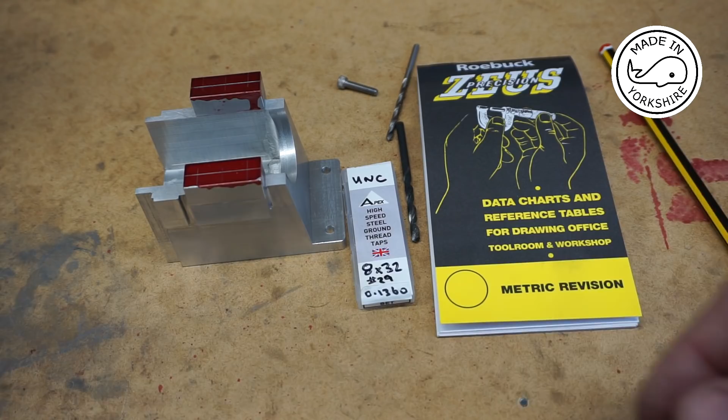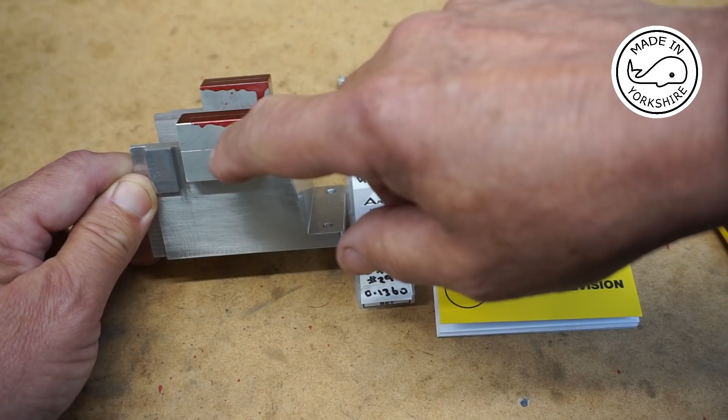Okay, so I've already machined the tops for where the bearings fit and marked them up, and I've super glued them onto the rear frame so they're spot on in the correct position. My plan is, for each of the holes, to put it on the mill and drill through with a number 29 drill bit right through.

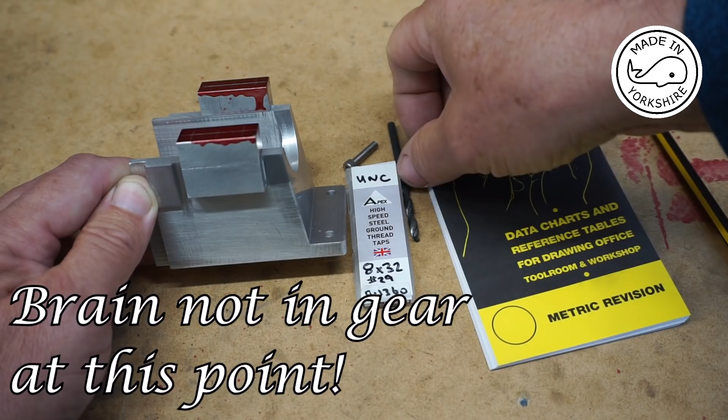Once I've done that for one hole, on the very same hole I'm going to drill through with a number 19 drill bit, which is a clearance drill for this 8x32 UNC bolt, and I'll just drill through the top bit and stop.

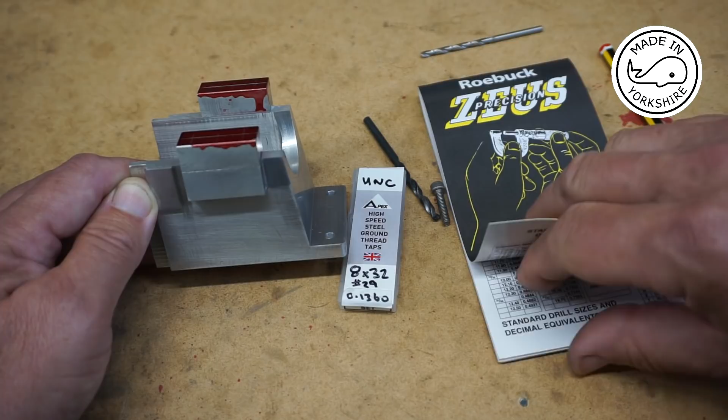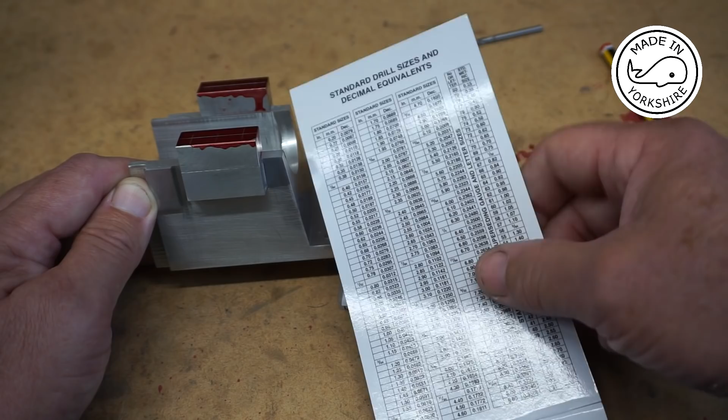I don't know whether anybody's, I guess lots of people use these, but for those who don't, this is a fantastic set of tables to show you all sorts of things. One very useful one is the actual standard drill sizes and their equivalents. Very, very useful information in that.

Anyway, just to get back to this, once I've drilled the top bit, I'll then tap an 8x32 UNC thread. Once I've done that, I'll do all the other three in exactly the same way.

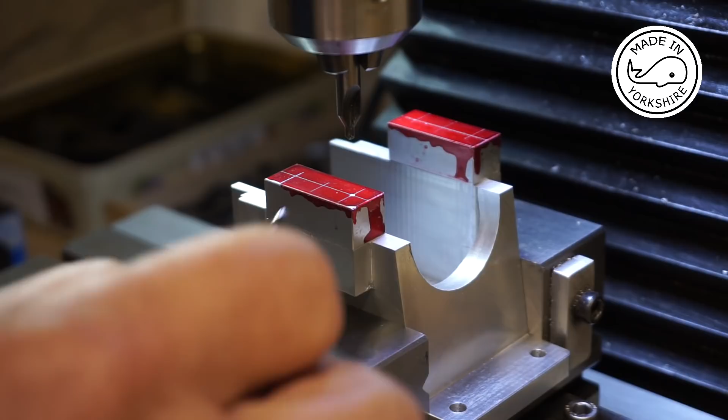Okay, so I used an edge finder to find the centre using both the X and Y axis, and it positioned me spot on in the middle where I've marked up. Now I've moved the X axis this way by 0.4 of an inch, and that's put me spot on my mark that I previously made. So what I need to do first of all is centre drill.

And now with the drill, the tapping drill size.

Now I've just realised my mistake. I shouldn't have gone right through, I should have only gone partially down here. But anyway, I'll try and get it right for the other ones. Well, I could kick myself for going right through there, total lack of concentration, I've got my mind on other things. But anyway, this clearance drill needs to go to a depth of 0.45 of an inch.

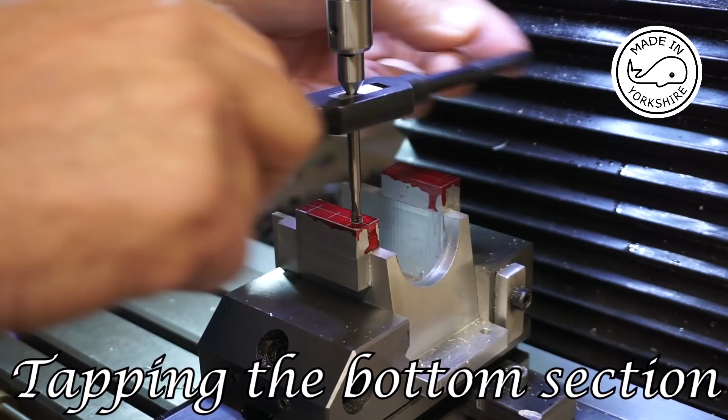Well, I think it's going to be one of those days today. I now realise I've not got a hex key for that. But anyway, what I'm going to do for the other three holes is follow exactly the same process, apart from, hopefully, not drilling right through it. So on the lower bit I'll drill to a depth of 0.4 of an inch.

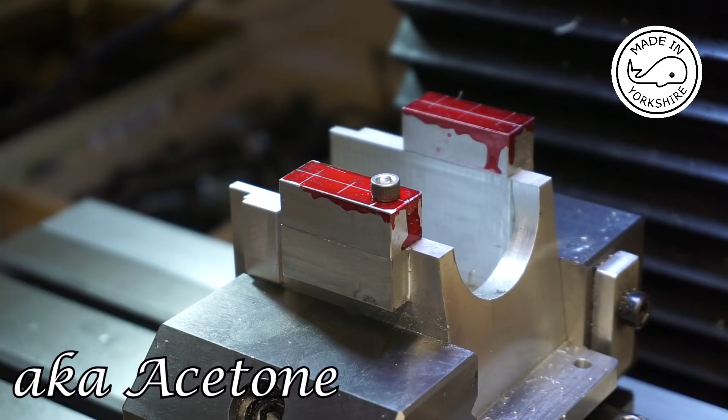Now I'm going to leave that bolt in there just to provide extra support, just in case. And likewise, when I get to the back bit, I'll leave a bolt in there. Once I've done all four, I'll take the bolts out, apply a bit of heat to break the glue joint, and then use some nail varnish remover to clean up the faces. And I think once I've done that, I'm going to have a bit of a rest, and get back to it tomorrow when I've got my brain into proper gear.

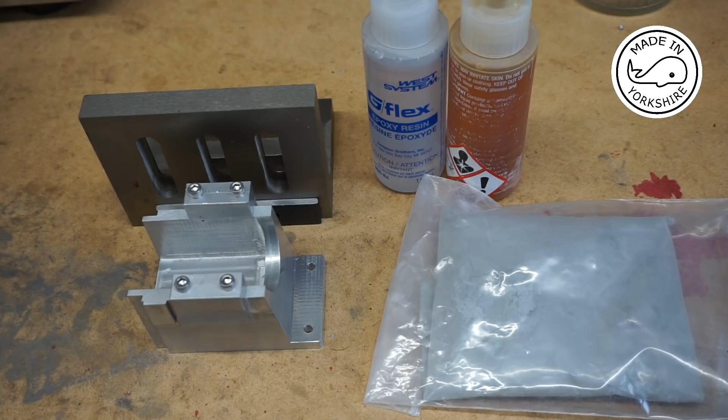So another day and things are starting to look up. Before breaking the glue joint, I put some witness marks on the top and the frame, just to make sure that when I reassemble it, these tops are going back on the right sides. And I cleaned the faces up with acetone and rebolted them down. So I'm happy with that so far.

Now, in terms of the hole I made, I filled it in, if I can find it. Must be good if I can't find it. Oh, there it is. What I did was, I was thinking back to my wood turning days, where I used to introduce aluminium into the wood using some epoxy resin. So I mixed some epoxy resin up and put some aluminium powder in, then filled the hole and left it overnight, and that's worked perfectly. Well, you can still see a bit of it, but better than JB Weld, which would dry a bit darker than that.

So what I need to do now is work out how to drill some half inch diameter holes right through here, making sure they're totally aligned and perpendicular with the base. What I've decided to do is drill a hole through the base. Now I can sort that out later on, so it won't be obvious that I've done that. I can peg it or something.

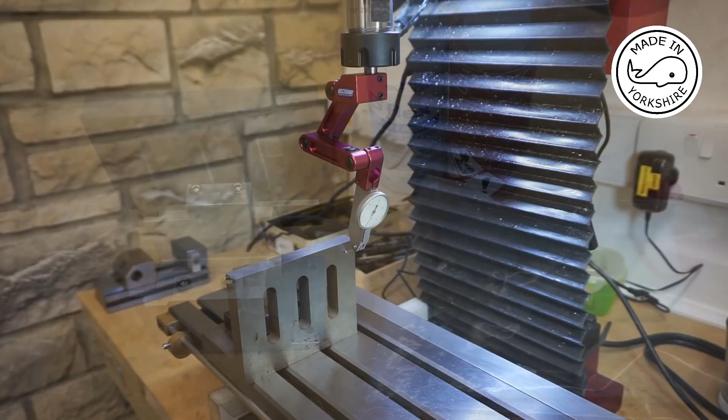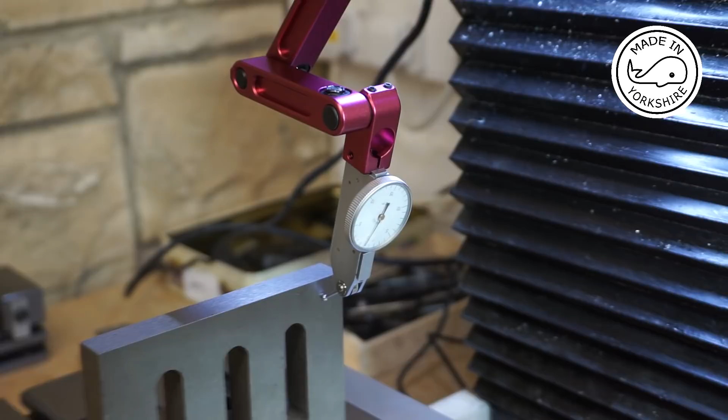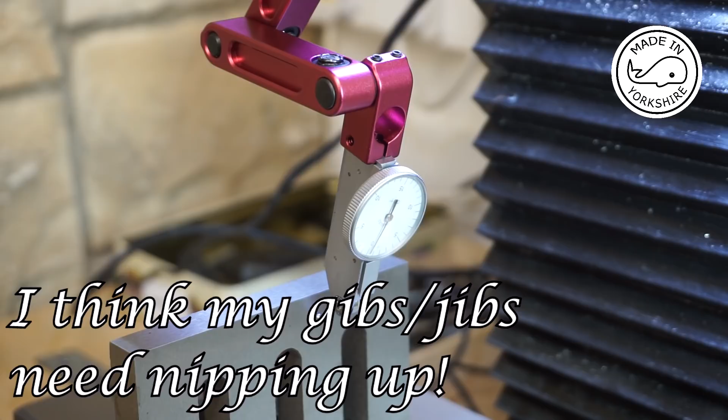Okay, so I've just put the angle plate on the mill, and I'm just checking that it's at right angles to the table. That's looking pretty good.

Now if I move the head down, there's just a little bit of run out there, 3 thou over the length. But I don't think there's a lot I can do about that.

I've checked that all the surfaces are clean, and they are, so I think I'll look to mount the frame on now. So I've bolted the frame onto the angle plate, and I'm just checking to see if there's any run out on the side.

So over the length of that, it's about 1.5 thou out, so I think that's good enough, to be honest.

Okay, so I've used an edge finder to find the centre. I've centre drilled. Now it's a matter of drilling right through and gradually working up to 31/64 of an inch. Once I've done that, I can then ream to half inch.

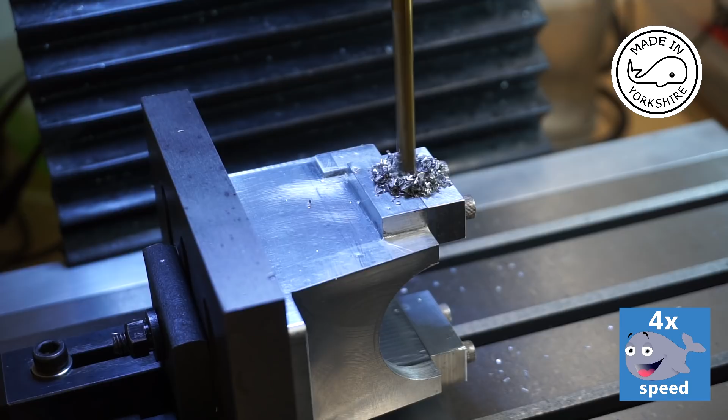Okay, so I'll continue to work through the drill sizes and then I'll get back to you once I'm ready to ream. Well, I'm really pushing the limits of my little mini mill. Height wise, I've actually had to grind about a quarter of an inch off the end of this reamer for it to fit in. But anyway, we'll see how we go.

Well, that felt nice. Now what I'm going to do is keep this setup exactly as it is, so everything's locked in terms of the X and Y axis, so this can't move. And once I've made the bushes in the lathe, I can make the bushes to fit, and then I'll do a final reaming through on the mill, so that should make sure that everything's spot on.

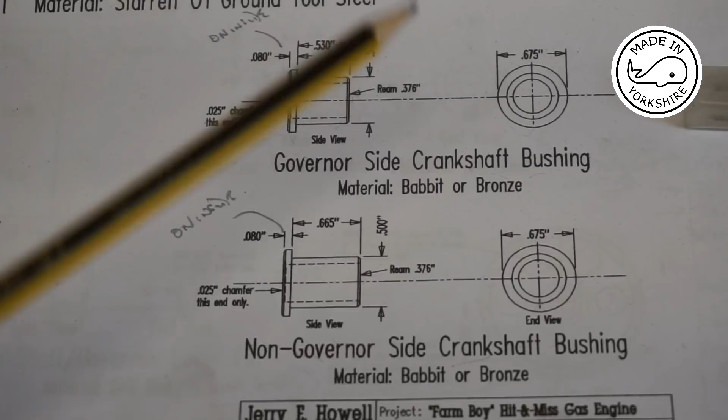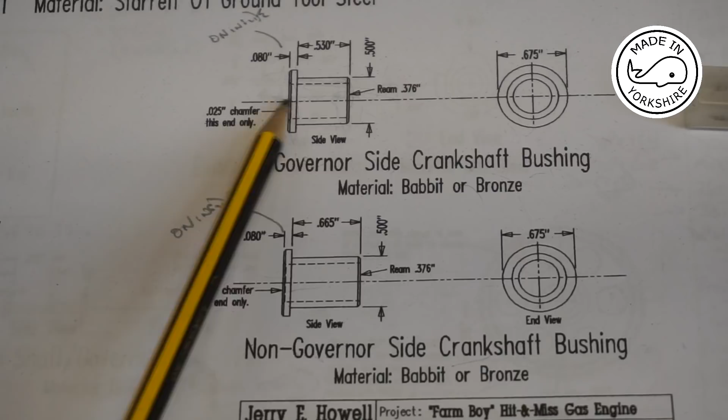Okay, so the bearings, aka bushings, are pretty straightforward, made out of bronze, two sizes, one for the governor side and one for the non-governor side, the only difference being the actual width. So what I'll do first of all is face off and then centre drill, and then open up a hole to a maximum of 23/64, which is 1/64 less than the reaming size, 3/8 of an inch. And I'll go to a depth of around about 0.6 of an inch on this one.

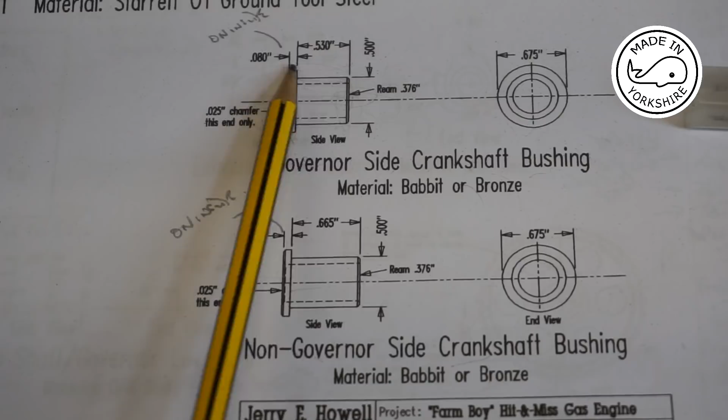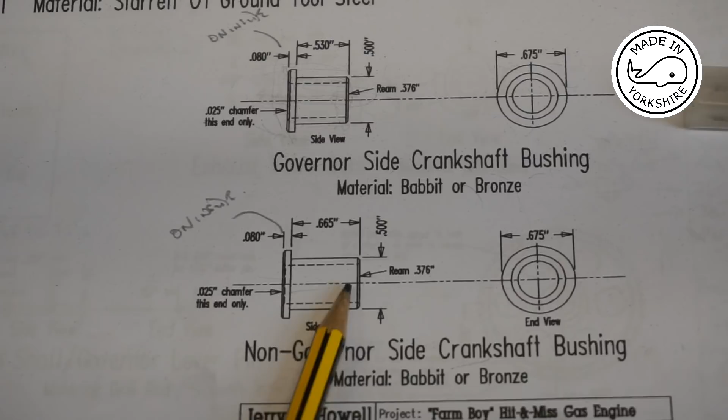Once I've done that, bearing in mind I'm not going to ream at this stage, I'll then turn the outside diameter down to 0.675 of an inch, which will give me this width here. And then for this area here, I'll turn it down to 1/2 an inch. Once I've done that, I'll part it off, and then repeat the same for this one. Then we'll put the bushes in the actual frame, and I'll ream on the milling machine.

So this outside diameter first of all needs to be reduced to 0.675 of an inch. Now it's already 0.843 of an inch, so take 0.675 off that and you get to 0.168, divide it by 2 and you get to 84 thou. So I need to take around about 84 thou off here. Now I don't have any of these flash digital scales on this lathe, but what I have got is this dial up here for the cross slide, and it works a treat, to be honest.

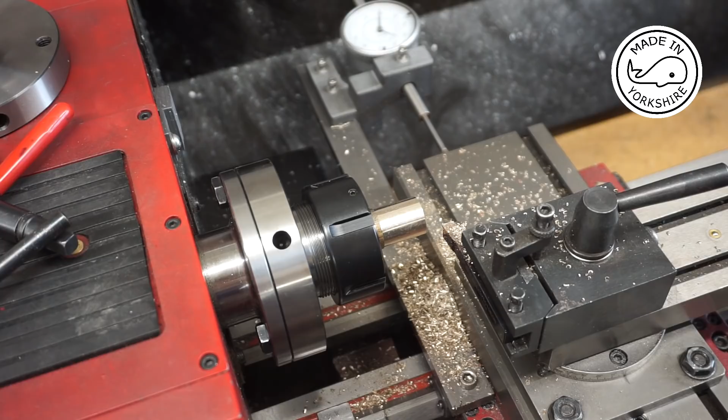Okay, so now I need to reduce this down to 1/2 inch, but I'm actually going to go to 0.501, so a thou over, just so I can get a nice tight fit in the frame before I ream it. And I need to go along a distance of 0.530 of an inch. So using my dial, and I've got my stop here. So my stop's pushed up, but it's loose.

So I need to go to 0.1, 0.2, 0.3, 0.4, 0.5, 1, 2, 3. So I'll lock the carriage stop, and then move that out of the way, and I'll put the tip of the tool on the workpiece, zero that dial, and then I'll reduce it by the appropriate amount. But I'll do all that off camera.

And now I just need to part it off 0.08 of an inch from this edge.

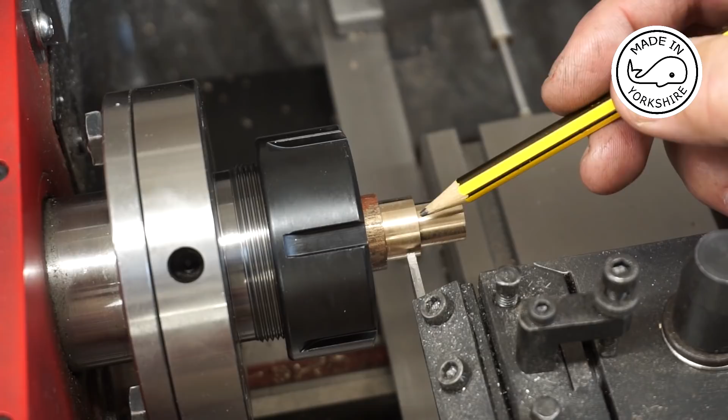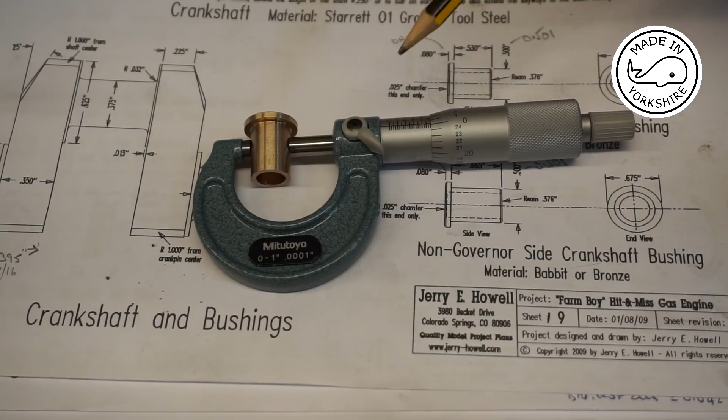Okay, so this is the larger of the two bushings, and I reckon it's 3/10 of a thou over 1/2 inch, and that is really good fit into the frame. Now I did mess up on the smaller one because I went a thou over 1/2 inch, and that was too big, so I had to put it on a mandrel and just take a bit off. But this is pretty much perfect.

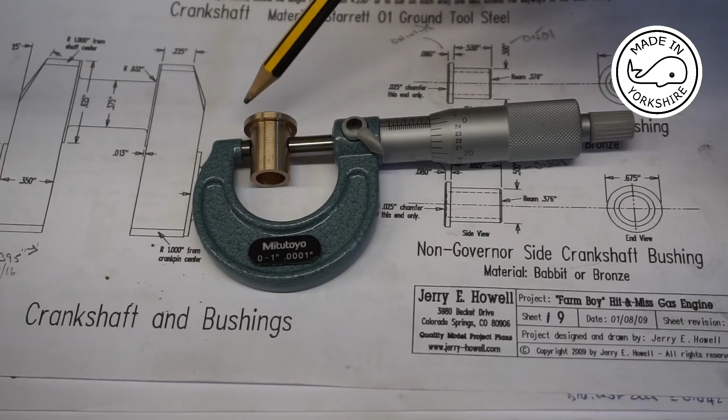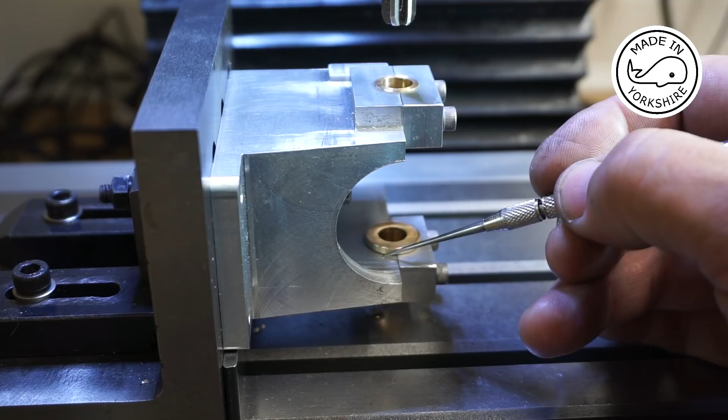So I'll go over to the mill, put this in the frame with the other one, and then we can ream it. And what I'm also going to do is put some witness marks on these, so I know exactly which orientation they need to go back in after they've been reamed. Okay, so the tops are screwed down. I've put a witness mark there, you probably can't see it, and a witness mark there, and we'll give it a go with this reamer.

So, fingers crossed, that's got it. Well, that was an interesting little exercise, and the instructions in the documentation just don't cover that aspect of the build at all. So I had to work out a method based upon my previous experience of making my other 3 engines, and hopefully I got it right.

This bit of test bar turns quite well, a little bit tight in a spot, but I'm sure it'll run in okay. The only thing outstanding is a need to drill and tap some holes for some oilers, but I'll leave that until I get to the build stage.

But all in all, I'm very happy with that, and I think my next video will cover the building of the crankshaft, which would make some sense, wouldn't it? So I hope you like the result, and I hope to see you later.